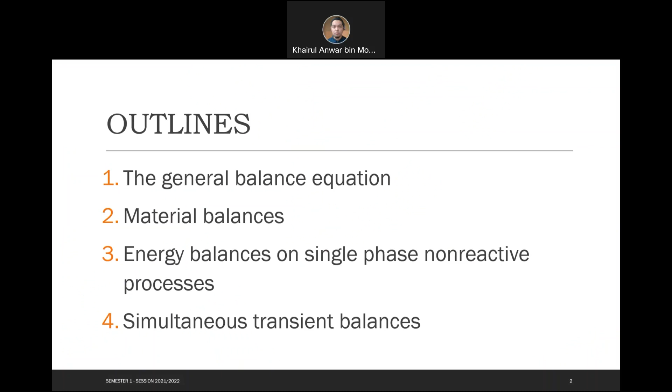The outline will be: the general balance equation, material balance, energy balance on single-phase non-reactive processes, and simultaneous and transient balance.

A system is said to be in transient or unsteady state condition if the value of any system variable changes with time. Batch and semi-batch process systems are always transient. In a batch system, if nothing is changing with time, then nothing is happening. And in a semi-batch system which has an input stream but no output stream, or vice versa, at least the mass of the system content must vary with time.

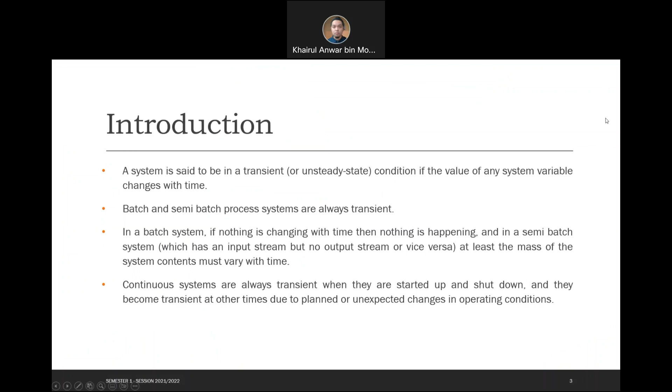Continuous systems are always transient when they are started up and shut down, and they become transient at other times due to planned or unexpected changes in operating conditions. The procedures for deriving balances on transient systems are essentially those developed in material balance and energy balance. The main difference is that transient balances have non-zero accumulation terms that are derivatives, so that instead of algebraic equations, the balances are differential equations.

In reality, the concept of a true steady state is fiction, since there are always process variable fluctuations in real systems. When you assume steady-state operation, you are assuming that these fluctuations are small enough to be neglected without causing serious error in calculated values.

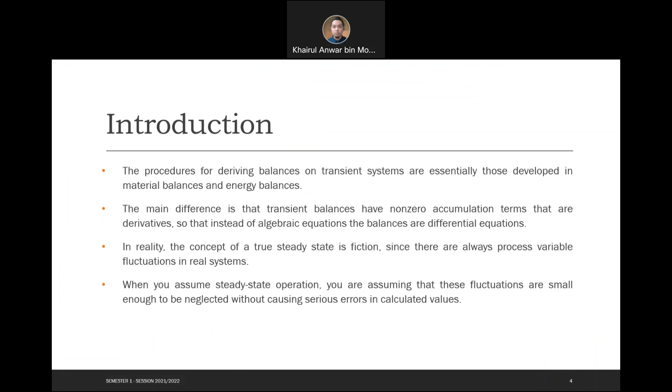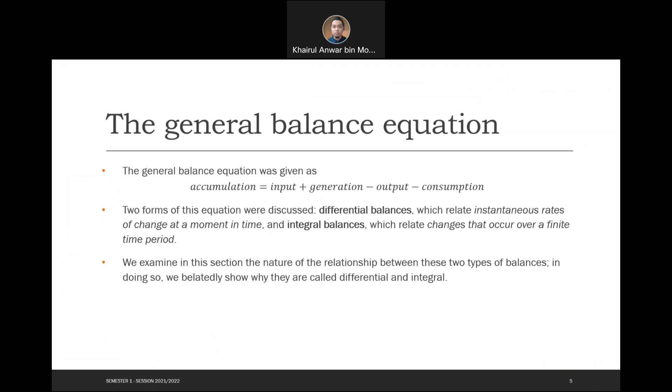The general balance equation. The general balance equation was given as accumulation equals input plus generation minus output minus consumption. Two forms of this equation were discussed: differential balance, which relates instantaneous rates of change at a moment in time, and integral balance, which relates changes that occur over a finite time period. We examine in this section the nature of the relationship between these two types of balances. In doing so, we belatedly show why they are called differential and integral.

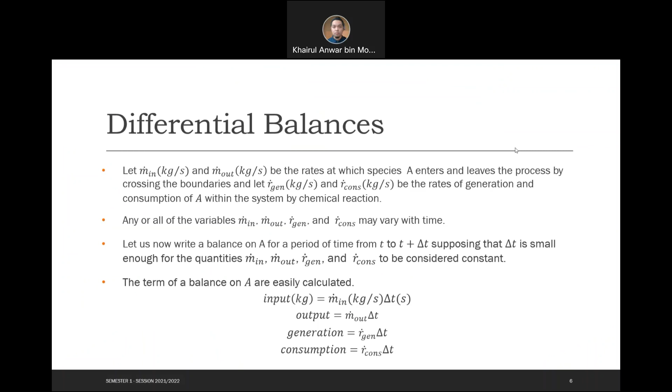Differential balance. Let m_in in kg per second and m_out in kg per second be the rates at which species A enters and leaves the process by crossing the boundaries, and let R_gen in kg per second and R_cons be the rates of generation and consumption of A within the system by chemical reaction. Any or all of the variables m_in, m_out, R_gen and R_cons may vary with time.

Let us now write a balance on A for a period of time from t to t plus delta t, supposing that delta t is small enough for the quantities m_in, m_out, R_gen and R_cons to be considered constant. The terms of a balance on A are easily calculated. Input equals m_in times delta t, output equals m_out delta t, generation is R_gen delta t, consumption is R_cons delta t.

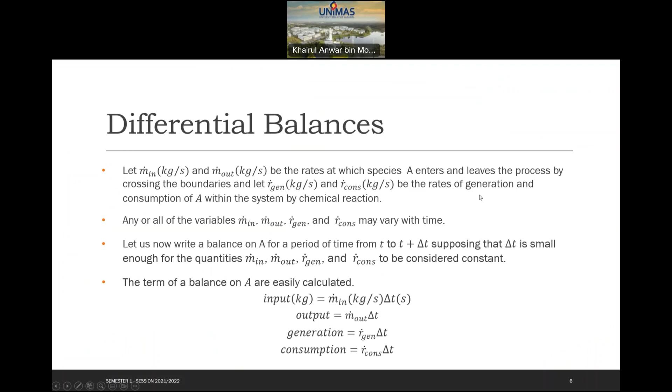We also suppose that the mass of A in the system changes by an amount delta M during this small time interval. By definition, delta M is the accumulation of A in the system. From the balance equation, delta M equals (m_in plus R_gen minus m_out minus R_cons) delta t. If we now divide by delta t and then let delta t approach 0, the ratio delta M over delta t becomes the derivative of M with respect to t, dM/dt, and the balance equation becomes dM/dt equals m_in plus R_gen minus m_out minus R_cons. This is the general differential balance equation.

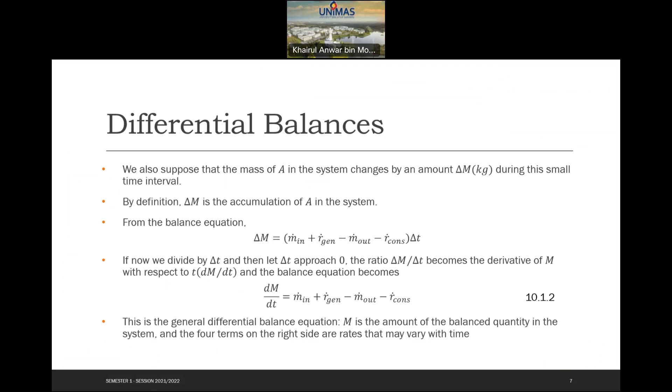M is the amount of the balanced quantity in the system, and the four terms on the right side are rates that may vary with time. If equation 10.1-2 is applied to a continuous system at steady state, the quantity M must be a constant, its time derivative therefore equals 0, and the equation reduces to input plus generation equals output plus consumption. However, as long as any term varies with time, the derivative on the left side of equation 10.1-2 remains part of the equation. It is concluded that the balance equation for an unsteady state system at an instant of time is a differential equation, hence the term differential balance.

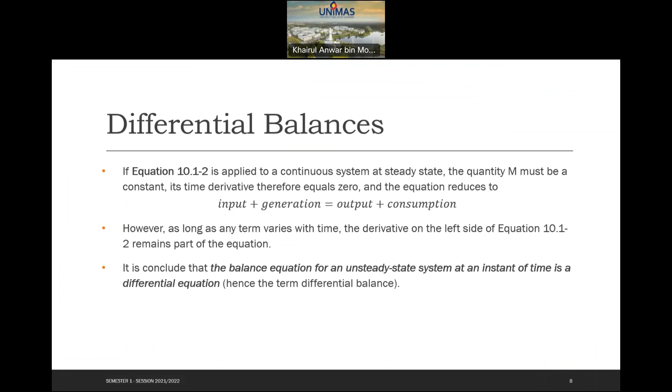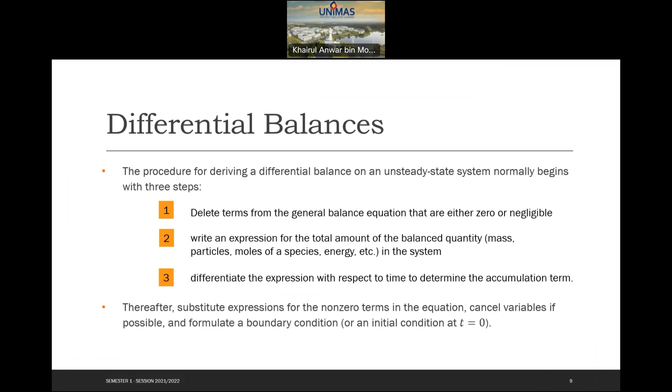Example. A continuous stirred-tank reactor is used to produce a compound R in a liquid phase reaction A to R. Feed enters the reactor at a rate of V naught liters per second. The concentration of the reactant in the feed is CA0, mole A per liter, and the volume of the tank content is V liters. The vessel may be considered perfectly mixed so that the concentration of A in the product stream equals that in the tank.

For this process, the rate of consumption of A equals kCA mole per second per liter of reaction volume. All fluids, the feed, the tank content, and the product, may be taken to have the same density, rho grams per liter. Write differential balances expressing the balances in terms of the variables shown on the following diagram.

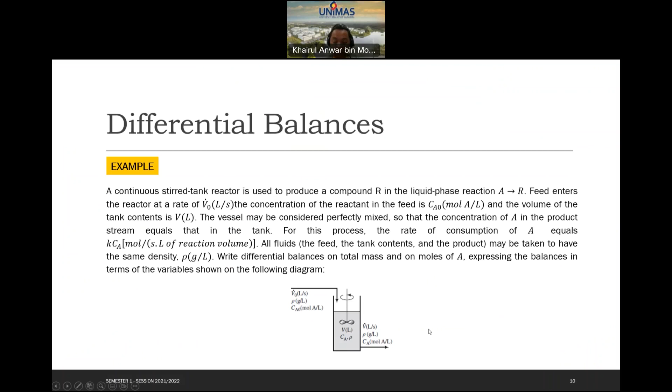To solve this question, first, the total mass balance: generation equals 0, consumption equals 0, accumulation equals input minus output. Mass in the vessel, M in grams, equals V times rho, the density. Therefore, accumulation in grams per second is equal to dM/dt, equal to d(V rho)/dt, equal to rho dV/dt, since rho is a constant.

Input in grams per second equals V naught times rho. Output is V dot times rho density. Therefore, rho dV/dt equals V naught rho minus V rho. We can cancel rho. Therefore, dV/dt equals V naught minus V. At t equal to 0, V is equal to V naught, where V naught is the initial volume of the tank contents.